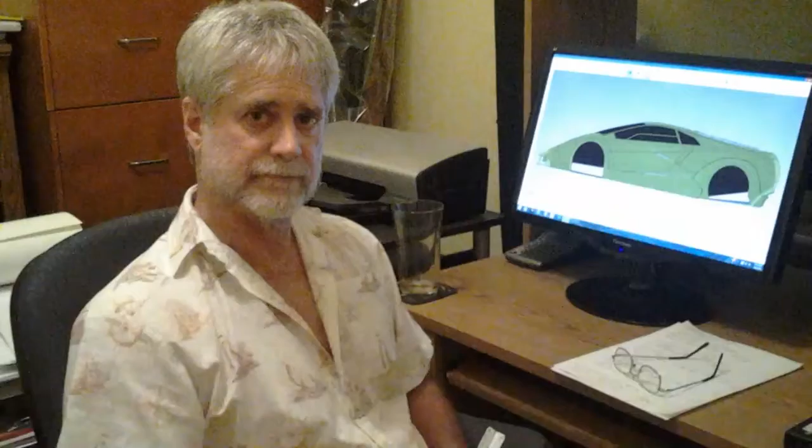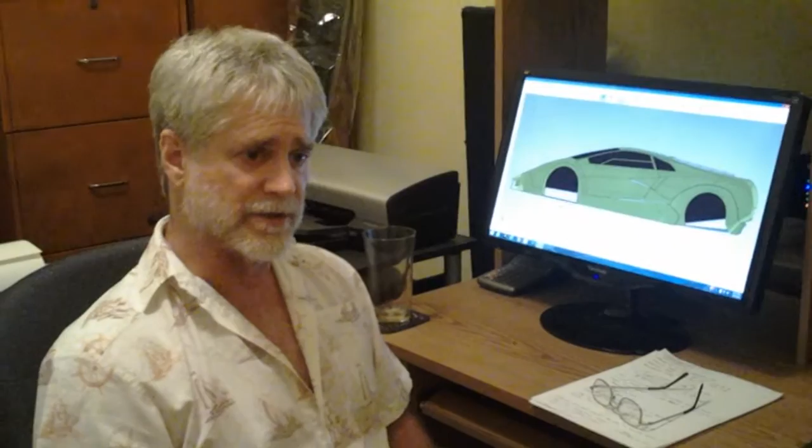Chupacabra build number 6. Up till now we've talked exclusively about the chassis and all the videos have been about it. I'd like to stop and talk about the body a little bit. This design is from Flavio Adriani in Brazil. He is a hobbyist, he is an architectural illustrator. He is not an automotive designer. And the body, as nice as it is, reflects that, and we're going to have to make a few changes on it. Show you what goes into turning an artist rendering into a producible piece.

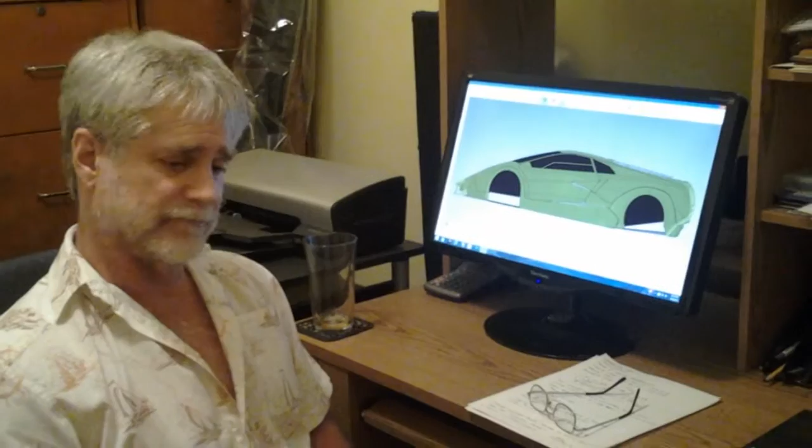My good friend Tom Stevens, his company is Design 2, is doing all the SolidWorks work on this. This is eDrawings. This is not a professional three-dimensional program, but this is what I have to look at it, think about it, sort out what I need to do on this. Let me give you an example of what I'm talking about here.

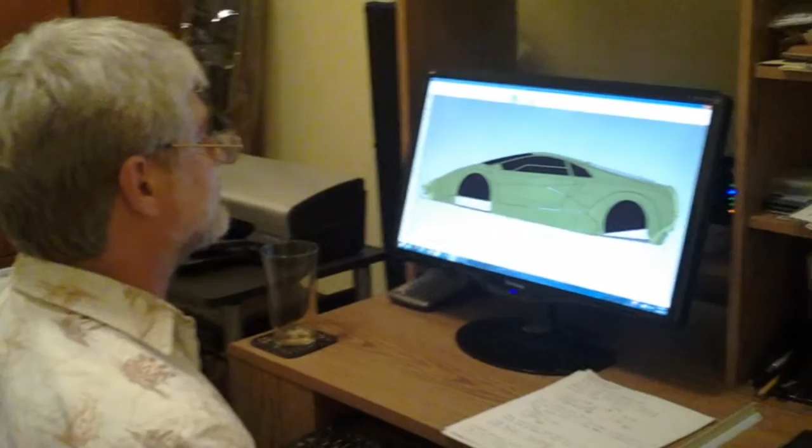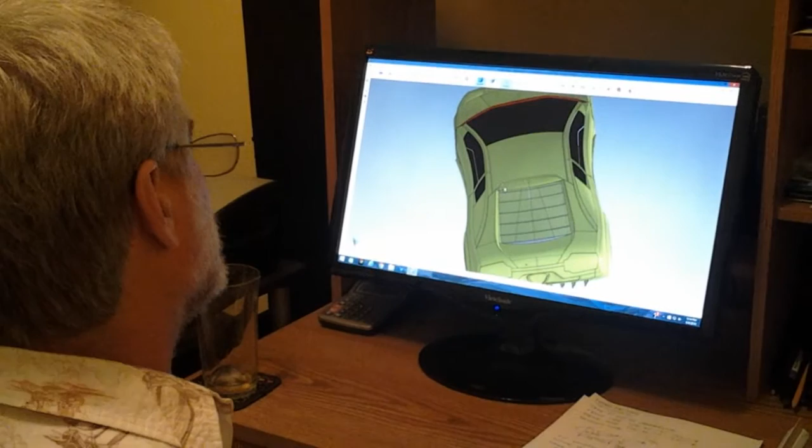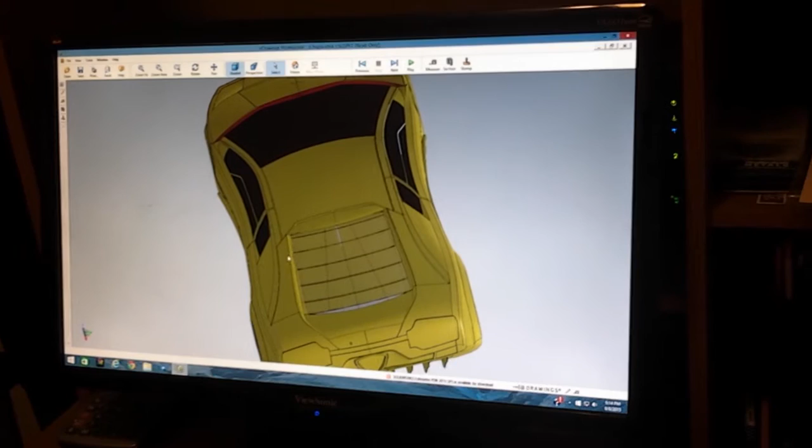Flavio's design, here's the trunk, something like this. Comes up here like so. Hinges are going to go right here, right here. But if you look right here, this is all glass, and you have a little bitty section right here that ties the whole thing together. That's not going to work. We're going to have to move the bodywork, extend it out like this so that we have enough bodywork and strength to make all of this happen right here. Just a typical example of some things that we're going to have to do.

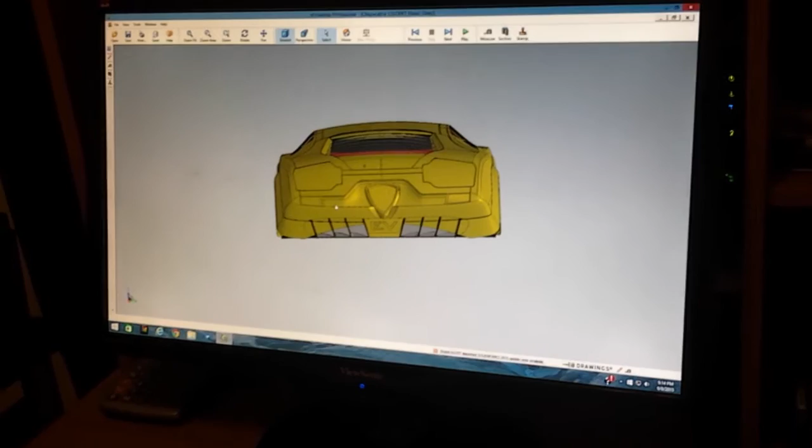This was originally conceived as an electric vehicle. That's the EV logo here. It doesn't have any exhaust pipes. The chassis and the headers are very critical as far as where they can be located in our chassis. There's a very limited location that we can go either way back here. Tom's going to have to take this out, redo this, and redo everything. We're going to get rid of all of this anyway, but redo all of that for a tailpipe. I wanted to show you all this before we did that so we can come back and compare it.

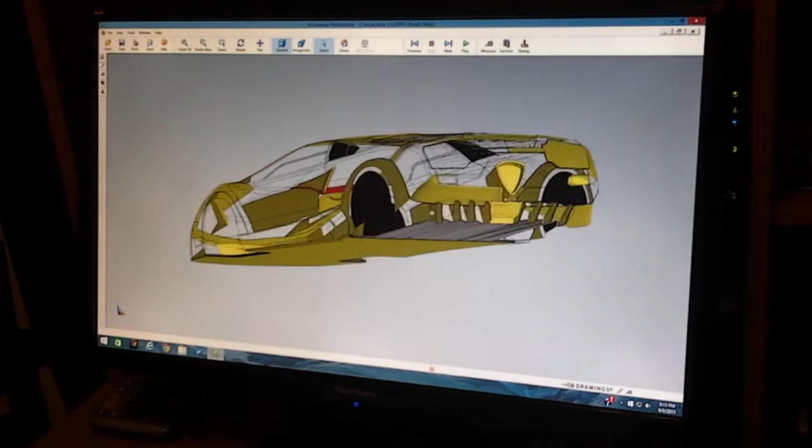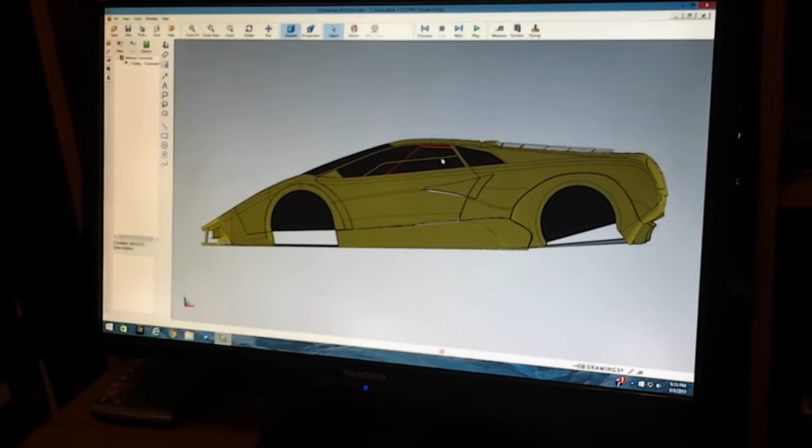Another thing we're going to do on this, and I'm trying my best to stay loyal to Flavio's design without ruining the lines or anything like that, but there's just a few things we're going to have to do on it. These windows, which are very Countach-esque here, that's not going to work either. What we're going to do, see if I can make this program work. Yeah. These windows are going to do something like this, with this whole piece being operable, and it slides forward instead of down. That way you have something more than the original Countach mail slot window.

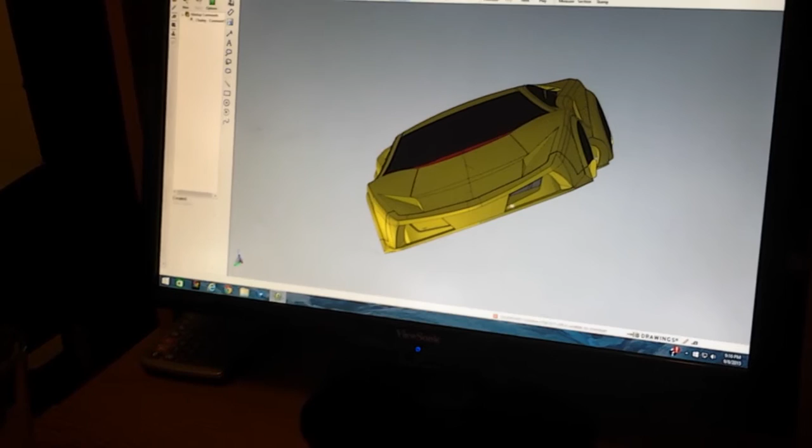Another thing we're going to do, this pod here, the headlight pod, we're going to use this headlight pod. These down here are going to go away, and that's all going to be grill. Something he's done pretty cool on this. See how the license plate bracket is forward of the grill. We're going to leave that and put the grill all the way across the car behind it.

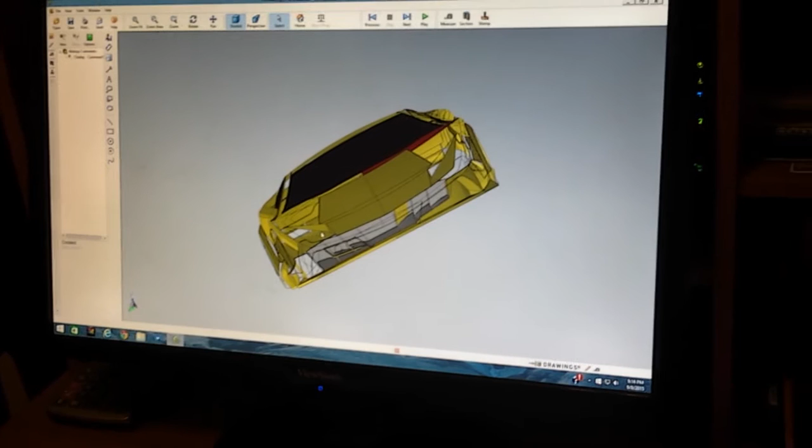This is something I run into on the Countach replicas I've done. You put a license plate up here and it takes away 50% of your grill area. Here we can cheat it up. We can move the license plate forward, put the grill all the way behind it, and I think we'll get a very good airflow there. I never had a problem with overheating with that little grill, but I just never did like it. Tom's sheets here, I've got 3 pages of markups, little details for him to do.

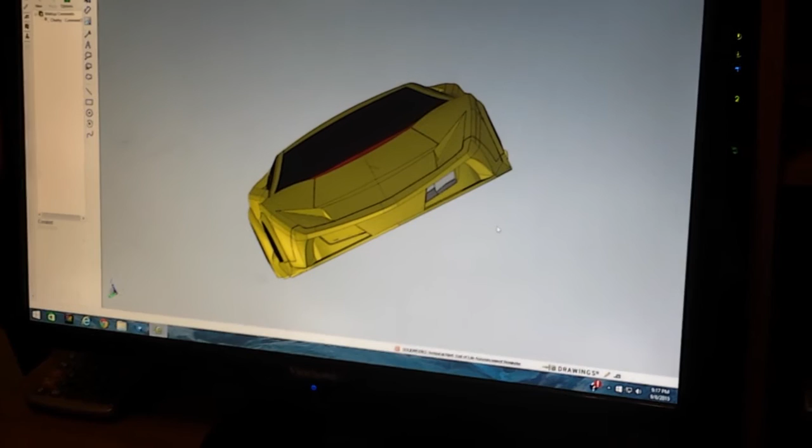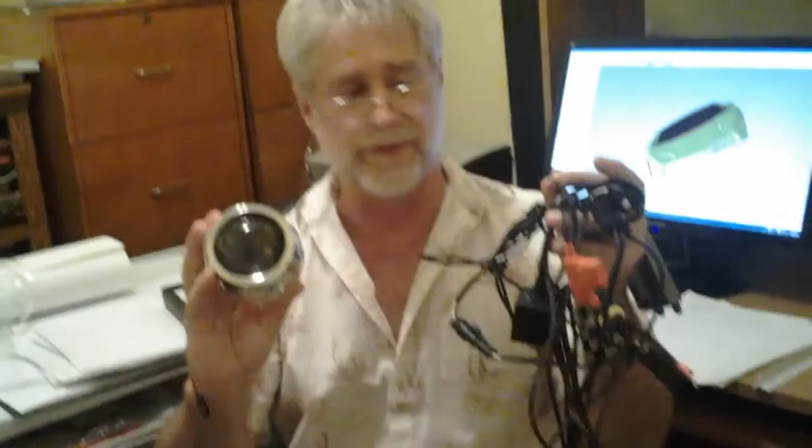The headlights are projector beam headlights. We've already got those. This is what a wiring harness looks like for projector beam headlights. This is the projector beam we're going to be using. They're going to go right in here,

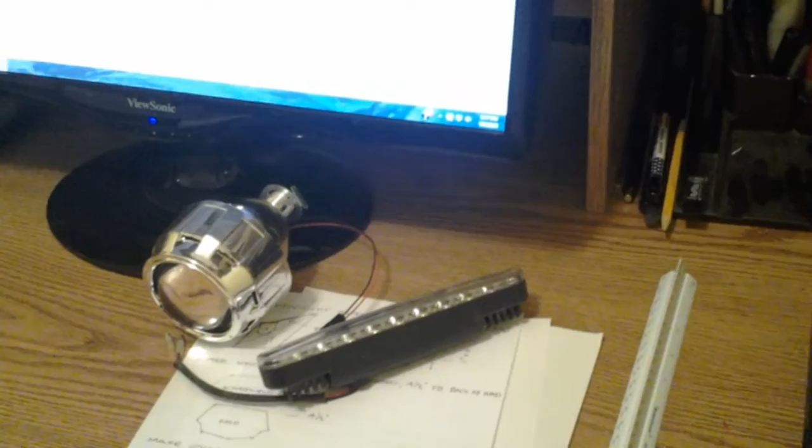and then there's an LED. Well, here, it's right here, I think. Yep. There's an LED light that goes right in here, and that's what all the headlights are going to look like. But this right here is going to have to be modified a little bit to fit the diameter of that projector beam, which also has a halo around it. A whole lot of little things like that.

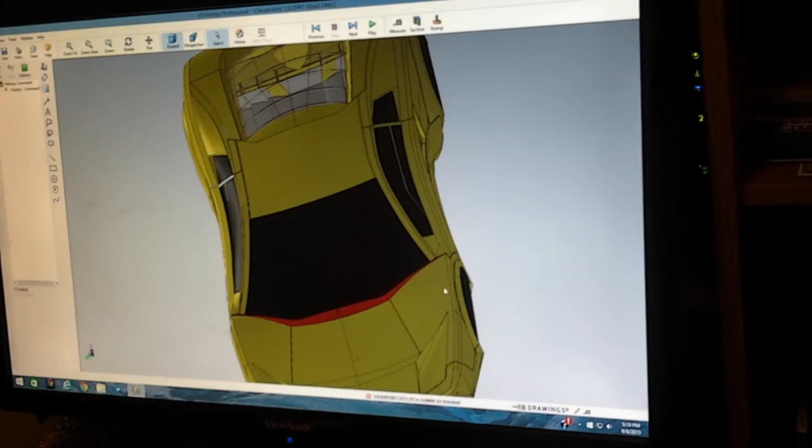Right here, there was no provision for the windshield wiper and so forth. In this particular model, the fuel filler goes right here in front of the windshield, and we're going to have to move the hood down a little bit to get clearance there. Whole lot of details like that, coordinating the way that this car was designed around the Countach. When we got the point cloud for it, we were pleasantly surprised that the wheelbase is correct, the height is correct, the aesthetics and proportions are correct, but there's other things we need to verify.

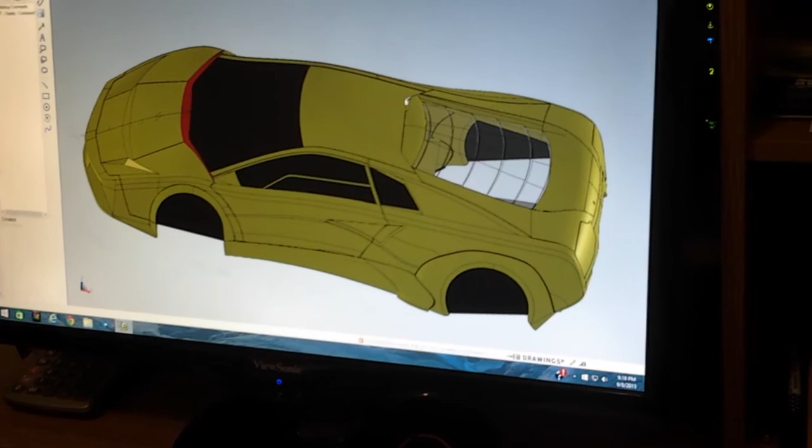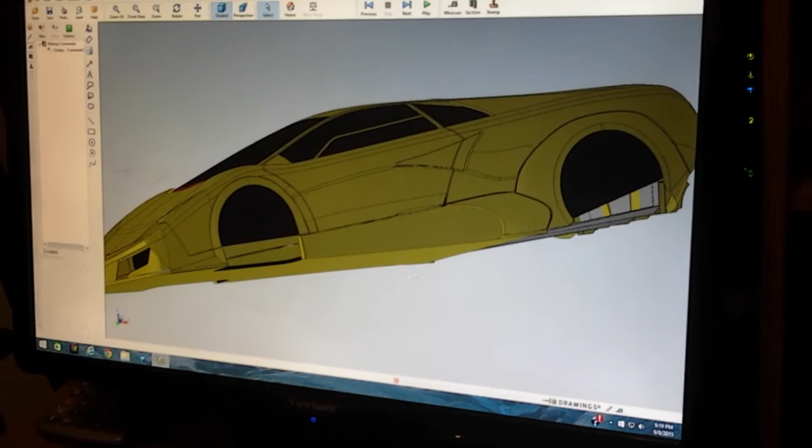There's a bulkhead in here behind the driver's seat. I'm thinking from my rough calculations that we're going to have to move this about an inch just to make clearance for the bulkhead. A whole bunch of little things like that from the rendering department to the engineering department. We're going to make a removable chin piece for it here. It's not if, but when that's going to get knocked off. Typical deal. One other thing we're going to do here.

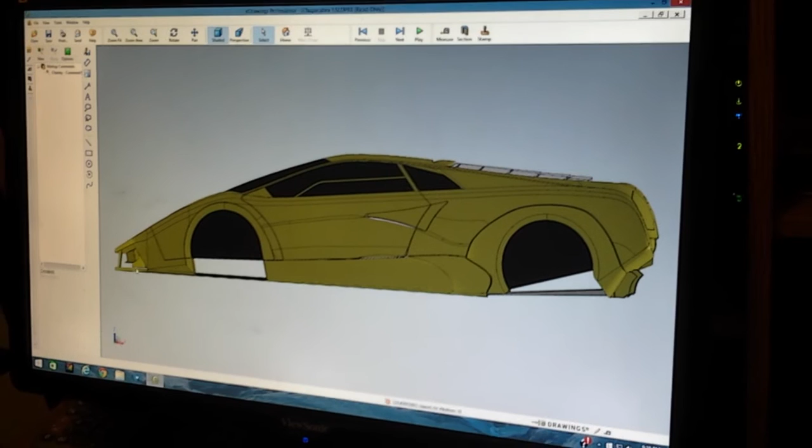This nose, this is the ride height of the car. It's at 5 inches above the ground. This nose is too low for that. It's way too close. We want to raise that up a little bit, but the way we're going to do that is to bring this rocker panel down just a little bit, raise the whole car up. That's something I had also done on the original Countach bodies.

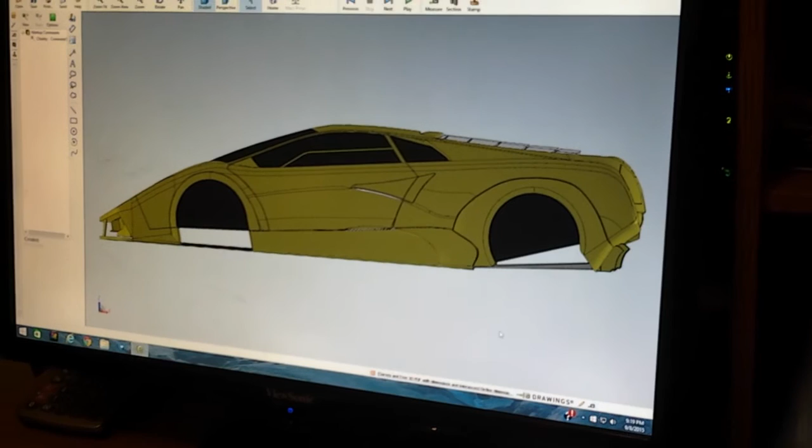That also gives a little more fender well clearance to fit a little bigger tire in here. The original Countach had an extremely short tire, and we're going a little bigger so that we can get a 17-inch wheel in there. That actually lends itself for that. But there's our body. There's what we're working on. Tom will be here in the morning. I've got 3 pages for him in revisions.

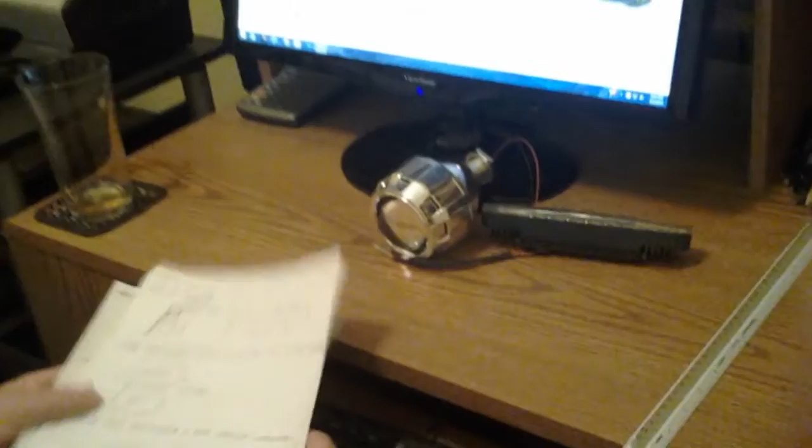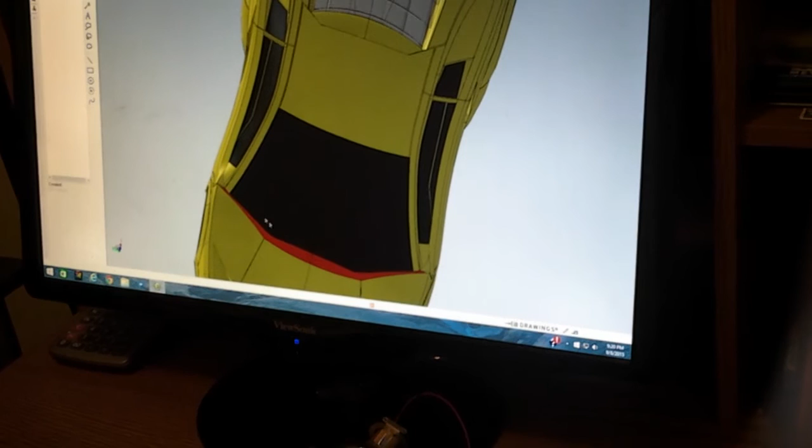One last thing that we're going to do. The windshield is very, very close to original Countach. Taking a windshield up to the Peterbilt guys the end of this week. They're going to scan it for me. Then we're going to take that windshield and slightly change this right here to allow the existing stock windshield, which is readily available and surprisingly inexpensive, to be able to be used in here and get a laminated DOT windshield.

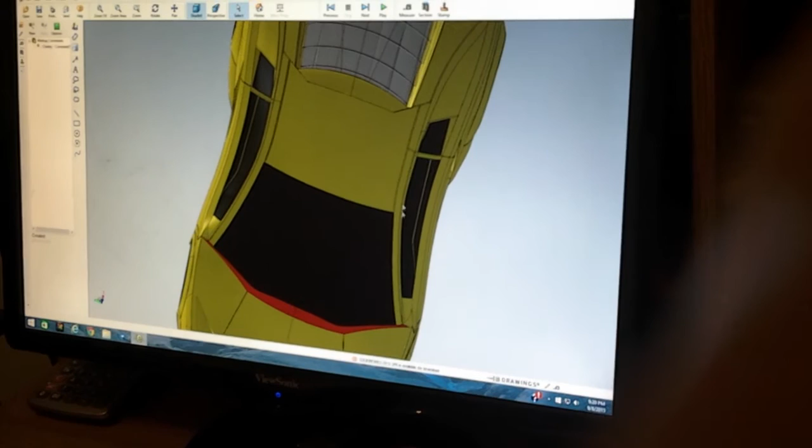We've got tempered safety glass on all this other stuff. That's sourced and done. We just need to get a template on that. But that's a little bit of what goes into turning an artist rendering into an actual working model.